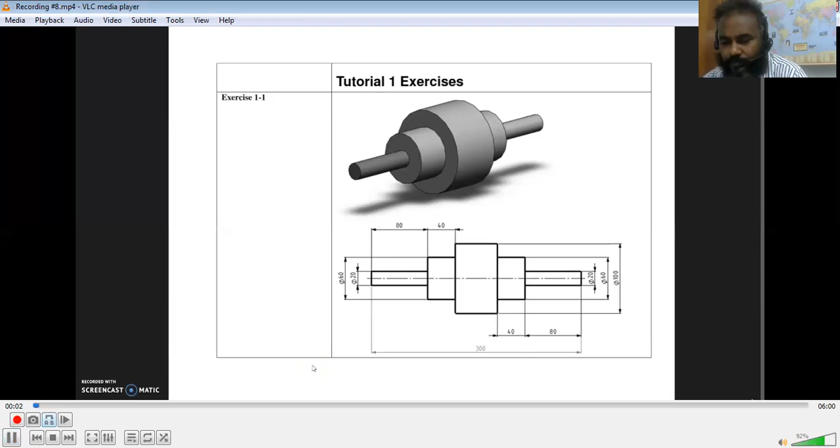We can start with the drawing part here, like the 20, and the reference where they have given is also very important. You should see from here to here if it is 80, or from here to here it is 80, and things like that. So from which edge to which edge is the dimension mentioned. We should be really careful to notice all these things and plan how we are going to start the sketch in your mind even before you start.

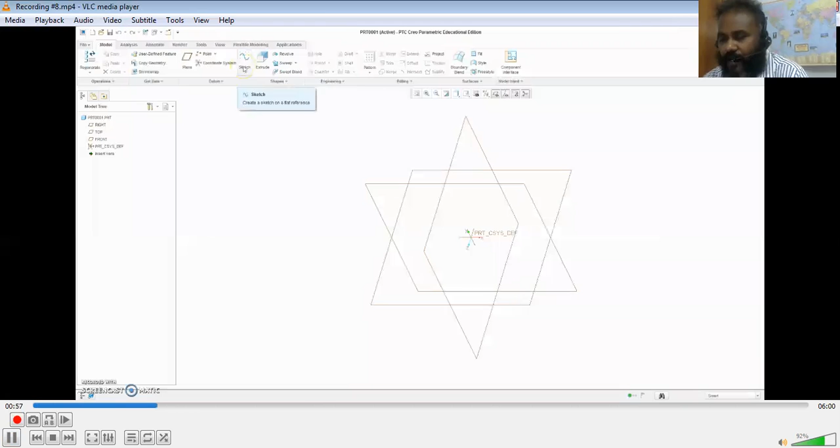You can name it with your own, say tutorial 1 and things like that. I've chosen the plane where I'm going to draw and sketch, and I'm going to draw a line now. That was actually taken as a starting point for us to draw.

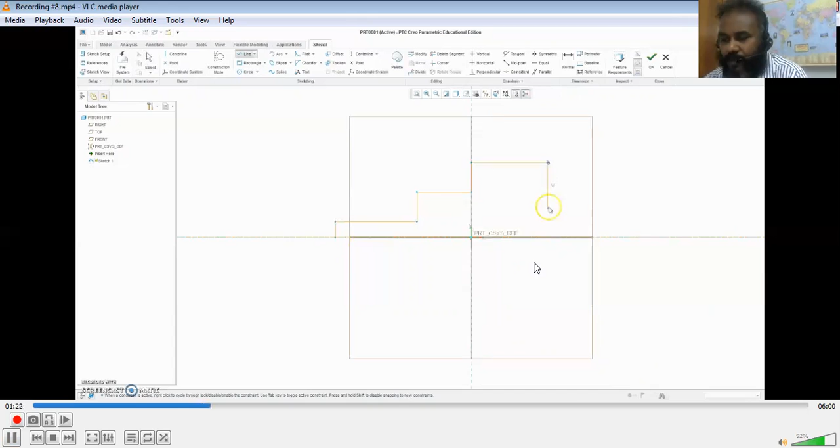So 3 steps are being drawn, and I'm closing it, and I'm supposed to change the dimension. Here I'm just about to rethink. This is just one side of the step. There is also one more set of steps which is going to come on the other side.

So will it be wise if I align this edge to the center plane? Again, there are multiple ways to do it. I can choose this and slide it to the left for this dimension, or I can just redraw. It's completely up to you.

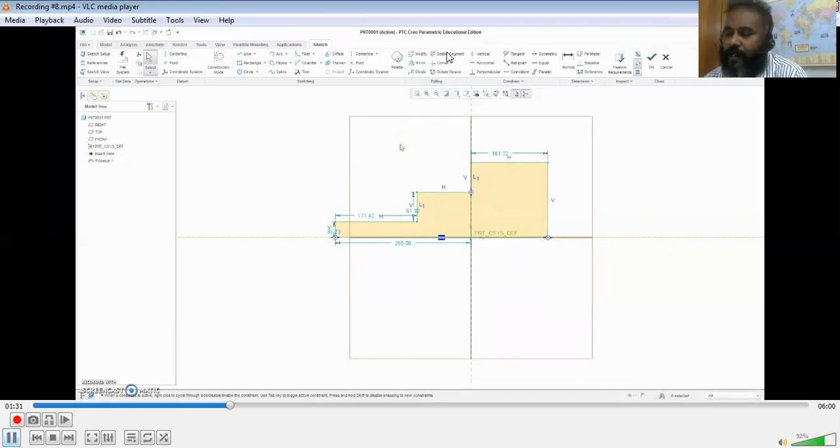So what I'm going to do is I am going to erase the segments that I've drawn, all the line segments which I feel are unnecessary, and I'm going to redo the part which is on one half of the part from the center line.

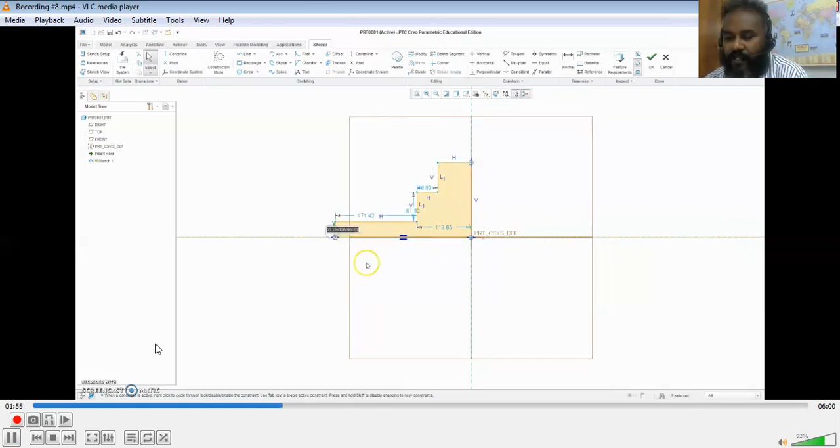So I should start doing the dimensioning. From the center line, this vertical dimension is going to be 10, and from here to here it is going to be 20, and this should be 20. And this is going to be 80, and this should be 40.

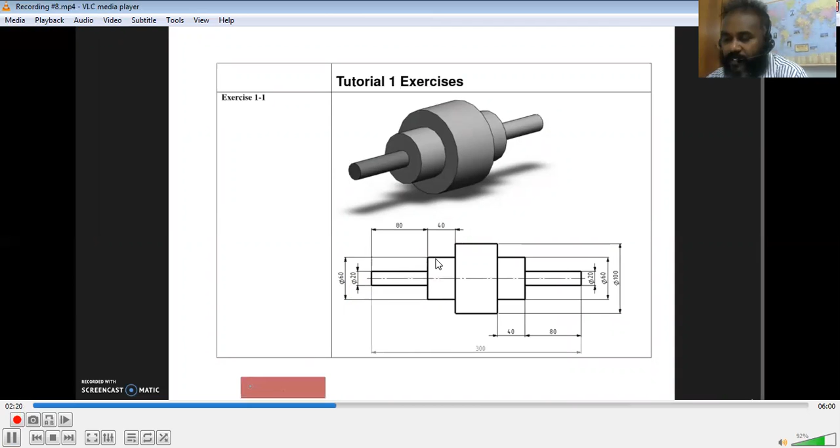So from here you can see how the arrow marks are representing, from the center line or from end to end. From the center line it will be 30 for the second step, or from the first step it is going to be 20. From the center line, it is going to be 30.

So you can decide what you're going to follow. And if you see here, there is one more arrow mark depicting from the center line, from this edge to the first step.

So you can choose any other dimension that you want to fix depending on what is given. So what I did is I chose this normal option and clicked this edge. Since this is not defined, there was no arrow mark or dimensioning available, so this popped up now.

So I can make a change here. If you remember from the given drawing, this dimension was not given, so it is up to us to decide. Let us keep it as 30.

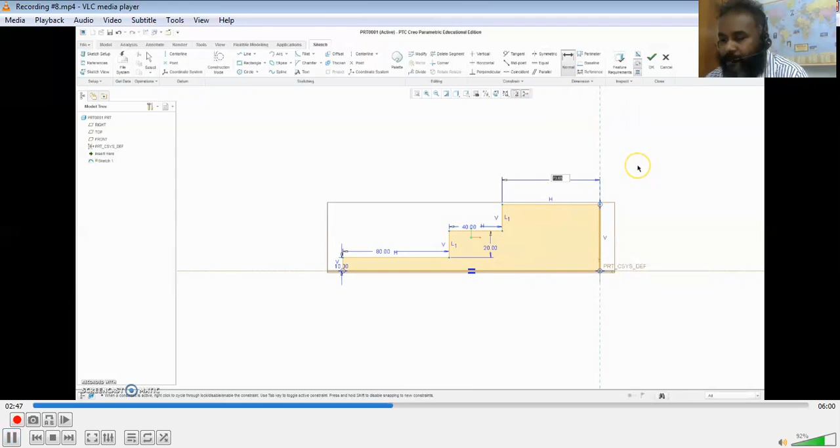And what about the height? So there is an objection raised by the software. It cannot be more than 50 because we have kept this as 20, 20, and 10. If you try to make it 60 or so, this cannot be a straight line - it might become a slope. So all those constraints are mentioned here.

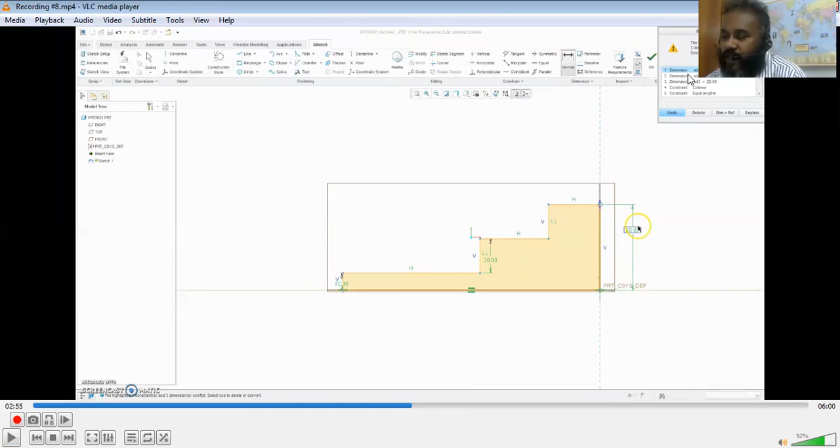Here it says equal height and equal dimension, and things like that. So if you want to remove it, you can. These are the constraints that are listed - some 7 are there, of which 5 are visible. So those kinds of changes also you can make.

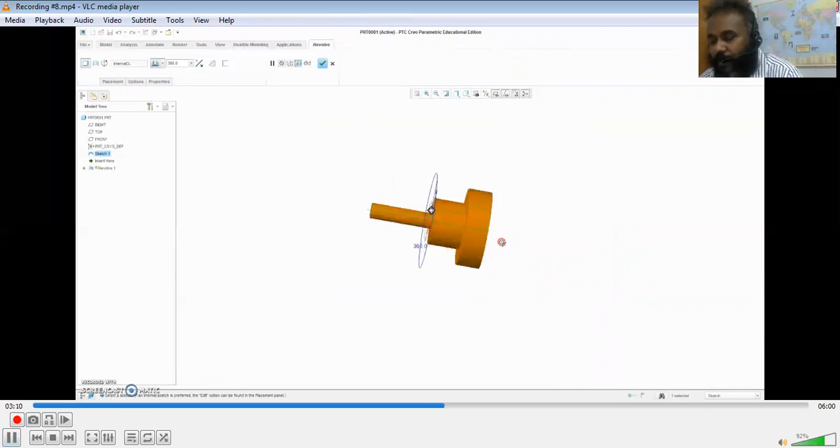So I'm going to say, don't mind, and I have created the sketch. Once I created the sketch, I'm rotating it to get one half of the part diagram which I wanted to make.

And how do I go about the remaining half? I can mirror it, which we learned in the last video. So click that, and choose what plane you want to use as datum - I chose the face of the extruded part, the rotated base.

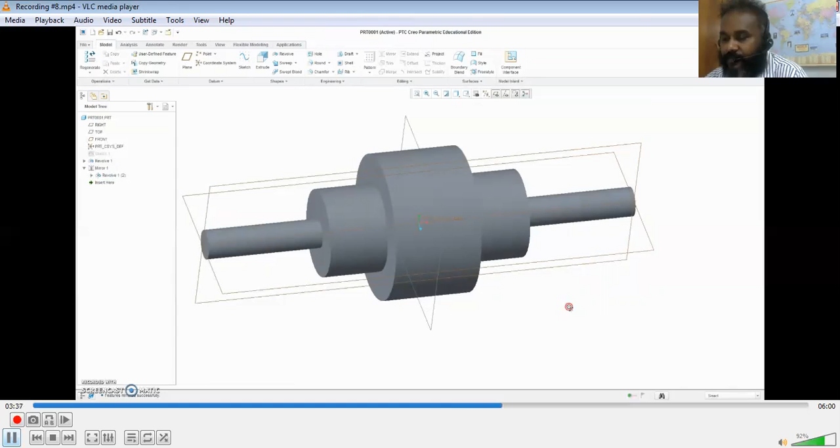So once that was chosen, it got mirrored, and this way we got the final object of desire through the revolve option. So this is one way of doing it - there are many other ways in which you can do it.

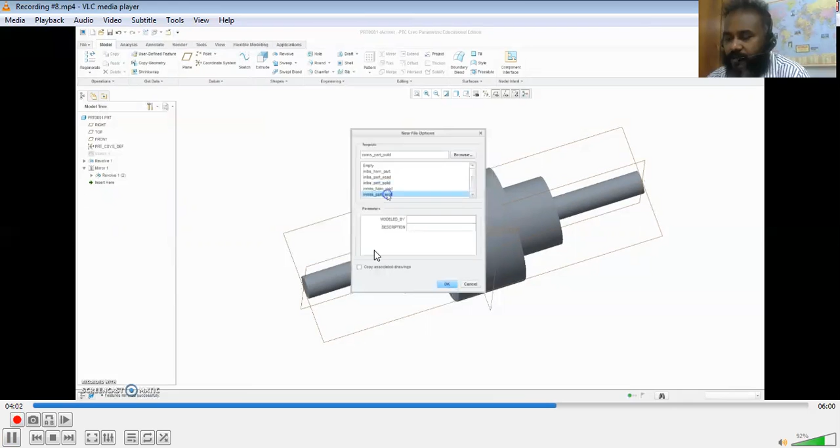So let's go on with the next option, which is extrude. I'm naming a tutorial and following the regular procedure which we saw in the first video. I'm choosing the sketch plane and drawing a circle. You can start from the back end, the bigger end, to the smaller, or smaller to bigger - multiple ways are there to generate it.

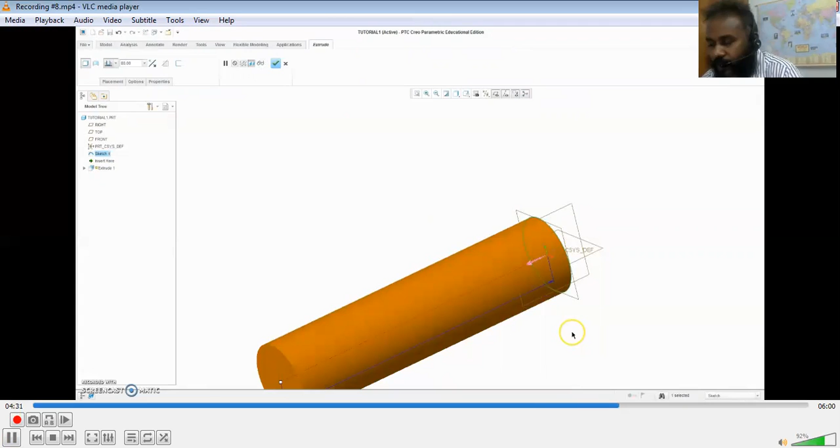So what I'm going to do is smaller to bigger end, moving from left to right. It's up to you, you can decide whichever way. The smallest part is made, and using that end face as the plane, I'm drawing the bigger cylinder, and I'm going to extrude it.

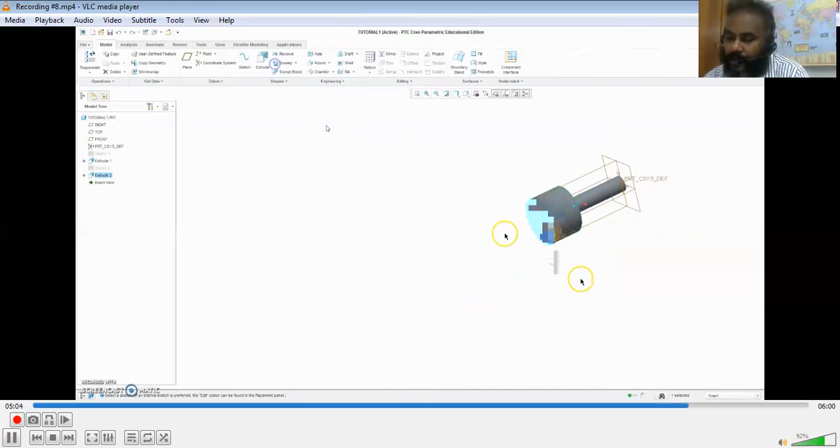Once that is done, I'll be drawing the third step. So all the 3 steps are done through extrusion. I can complete the entire picture through extrude itself, all the 6 parts, or I can as well have the mirror option employed.

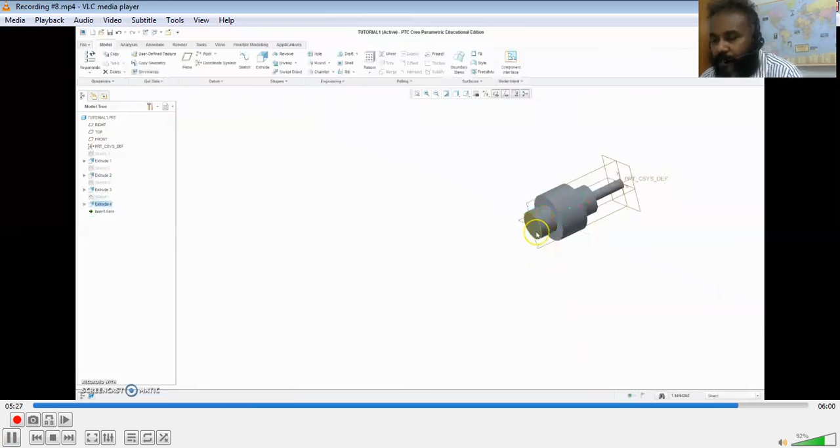Using that as a plane, I'm completing the last part. I'm drawing a circle of 10 mm radius and going to extrude.

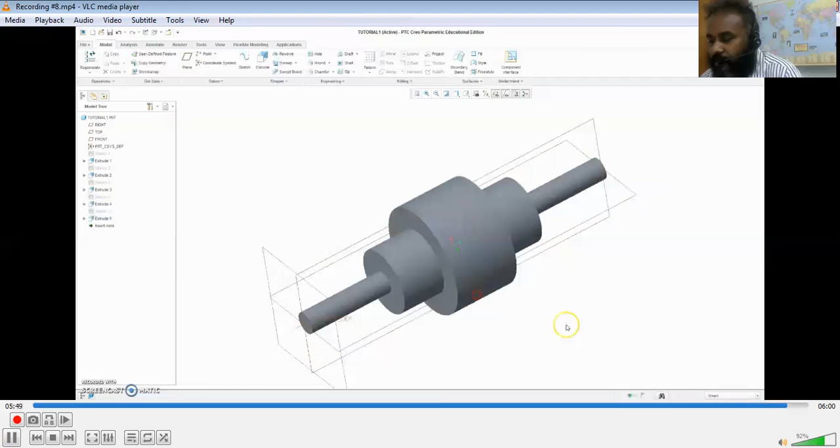So either way, you're going to get the same part. It should not matter which way you followed - the final part that you arrive at is the most important part which is required.